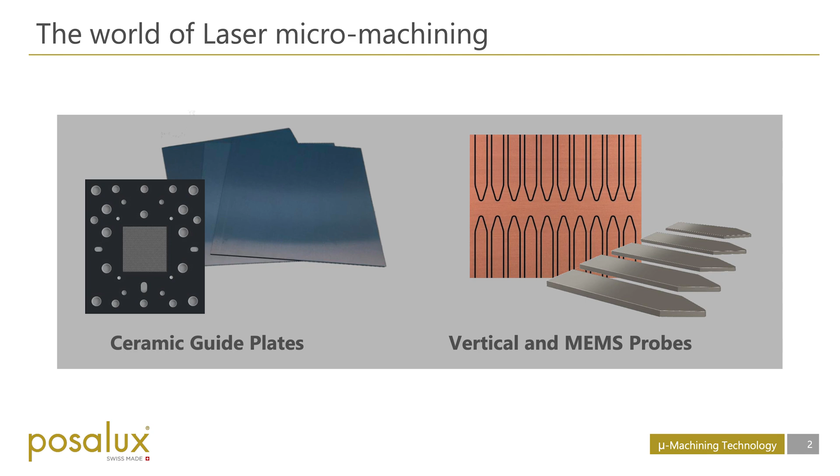Then I will discuss increasing challenges and the work done by our application and R&D people. After this, I will go back to the initial question to understand if femto-laser is really enough to cover actual and future needs. The question is: femto-laser, yes, but—and we'll see what are the other essential elements. Then I will finish with a quick conclusion and make sure the initial question gets an appropriate answer.

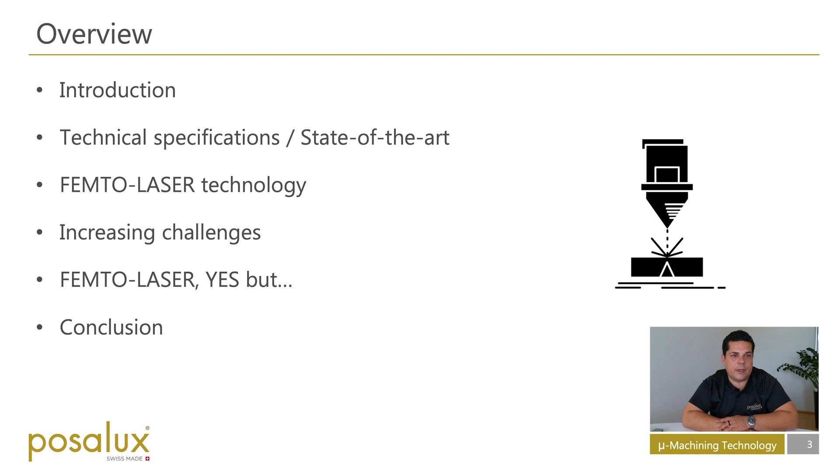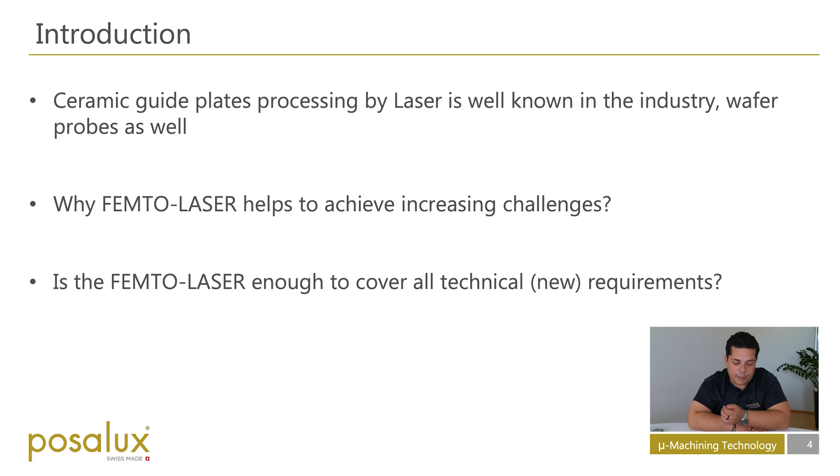Ceramic guide plates processing by laser is well known in the industry. We also have seen a tendency to cut probes also by this process. Why does femto-laser help to achieve increasing challenges? All along this webinar, we will understand if femto-laser is enough to cover all technical requirements, actual and future.

Now, technical specifications and the state of the art for guide plates. Here we can see the main specifications for drilling and what must be achieved: round, square, and rectangle holes, dimensions down to 20 micron or less, corner radius if possible less than 3 micron for square or rectangular holes.

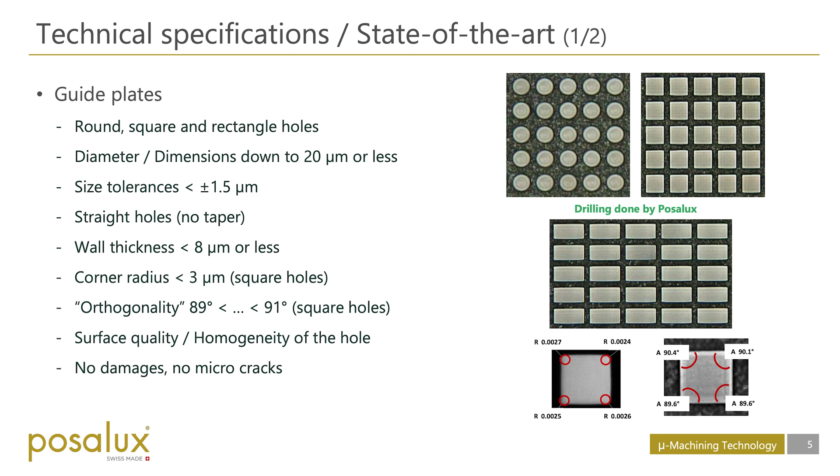Then, to avoid any functional problem with the guide plates, there must be no damages and no micro cracks. Of course, there could also be additional requirements, but here we talk about the most important ones.

Now, technical specifications about vertical and MEMS probes. I mentioned at the beginning of this webinar that the tendency to machine this kind of probe by laser is increasing. Here we can see the most important specifications. We start with size tolerances, which must be less than plus or minus 1.5 micron, with a minimal width down to 15 micron.

Here is an example of work we did in our R&D to reduce the width of probes, where we actually achieved 15 micron, but of course it can be even less with femto-laser.

A sharp angle is also important to correctly hold the probe during the test. This angle should be as small as possible, but generally should be less than 5 micron.

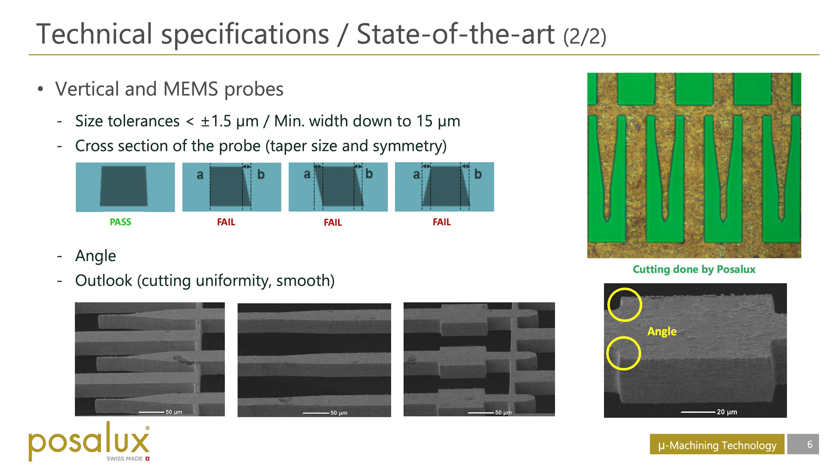Last but not least, the outlook after probe cutting is also a very important criteria or specification. The cutting uniformity and smoothness is a key point as well.

So let's deep dive into the femto-laser technology. What does femto-laser mean? A femto-laser is a laser which emits optical pulses with a duration well below 1 picosecond, in the domain of femtoseconds.

For long pulse laser like microsecond or nanosecond laser, the main issue is material integrity. You can see in the picture some ejected material, damaged surface, heat affected zone, melt zone, and micro cracking, which are not present in the ultra short pulse laser process. You have no debris, no damaged surface, no melt zone.

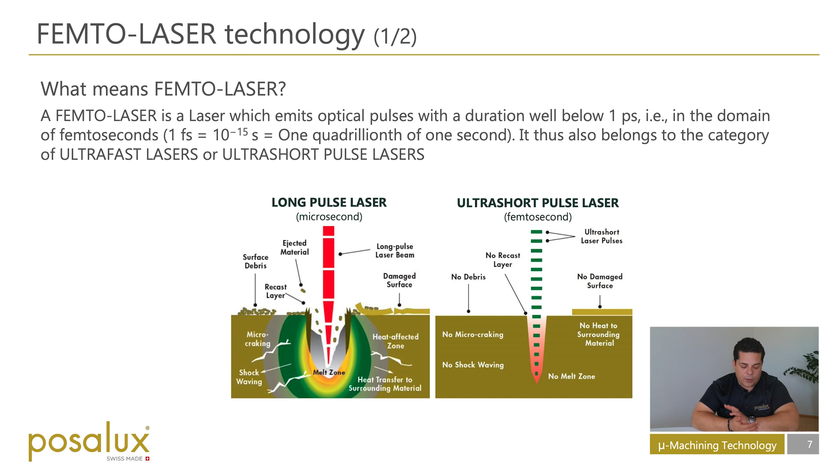So we can say the femto-laser is like a cold ablation process. The pulse duration of the laser is the key parameter to achieve a non-thermal process. The maximum pulse duration to avoid thermal effects is dependent on the material. Generally, a pulse duration less than 500 femtoseconds is okay for most materials. Here we can see the difference between ultra short pulse, which is less than 500 femtoseconds, and a long pulse laser, higher than 500 femtoseconds.

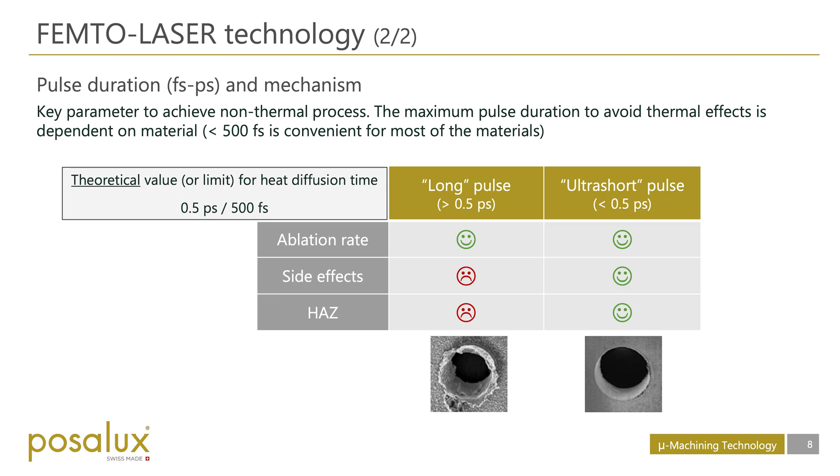Now that you have a better understanding of what a femto-laser is and its specifications, let's talk about challenges. Here we put some points which we worked out with our application team, representing the tendency of the market and what we will need in the future. First, the increased number of holes per guide plate. We did a test where we drilled more than 100,000 holes with reduced pitch, meaning a wall thickness down to less than 8 microns.

Second challenge: productivity. When you have a lot of holes to be drilled, like more than 100,000 in this example, productivity is very important. We are talking about several days of production. So if we can reduce the production time, this is also very important because it will reduce the cost.

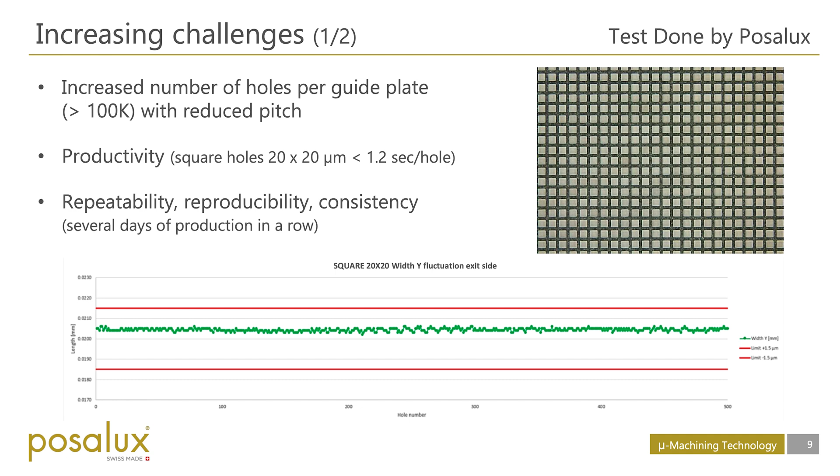The repeatability, reproducibility, and consistency of the hole quality. We run several days of production in a row, so it's important to have the same quality of the hole from the beginning. The first hole we drill and the last hole we drill must be the same quality and consistency. Here we have a graph showing, all along a production run, the stability of the size of the holes, which is about plus minus 1.5 microns.

What is very important is also the high positioning accuracy. Here we have a process accuracy within plus minus 2 microns. This is also the tendency, to reduce and ensure the positioning accuracy is stable and very small. Plus minus 2 microns is a challenge, but it is already running into production.

Stability and reliability is also part of the challenges. We are running 24/7, so we can couple this with the consistency we just talked about. The stability is very important. We also have to distinguish between R&D and mass production. All what we do in R&D is very important, but applying it to mass production is not just applying what we did—it also requires experience, preparation, and adjustment to make R&D matching with mass production.

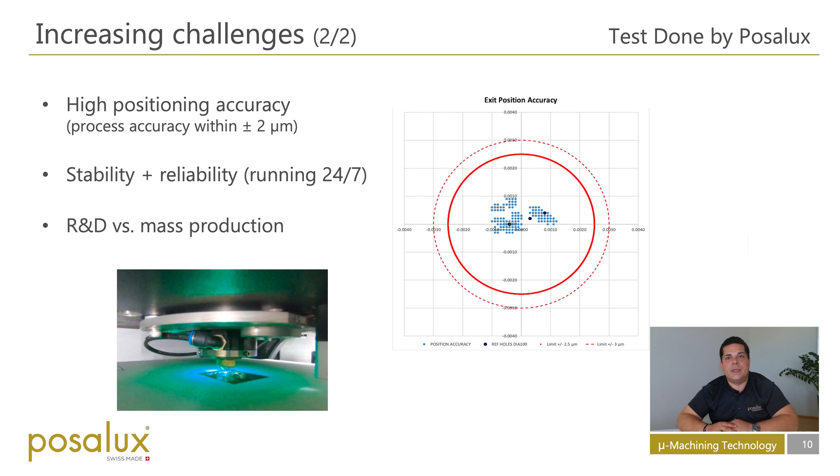To sum up, the femto-laser really helps to achieve challenges in terms of productivity and surface quality, but it doesn't cover all the challenges mentioned earlier. Some other components are essential to reach a higher level in application.

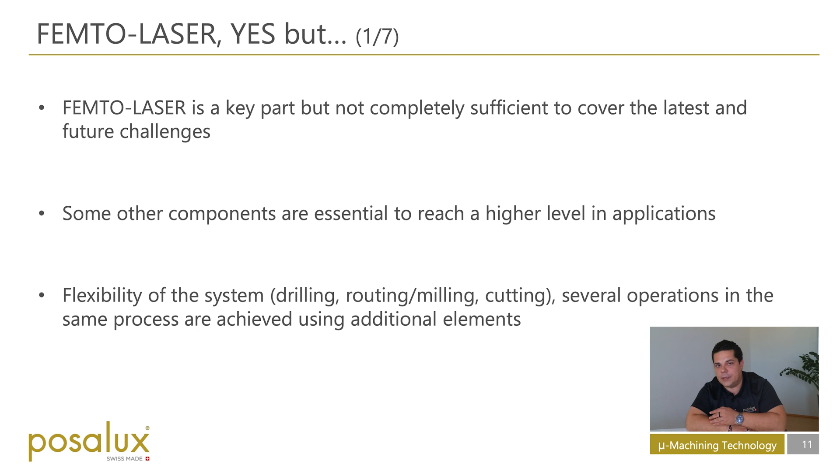Flexibility of the system is needed—drilling, routing, milling, and cutting. Several operations in the same process are also achieved using additional elements and not only the femto-laser. Femto-laser, yes, but a precession head is needed—in other words, an optical 5-axis beam management system.

So the technology shown here demonstrates the comparison between conventional laser drilling and 5-axis drilling, where you can see the laser beam can be tilted and moved following 5 optical axes: X, Y, Z, and incidence angles. Thanks to this, specific geometries can be achieved.

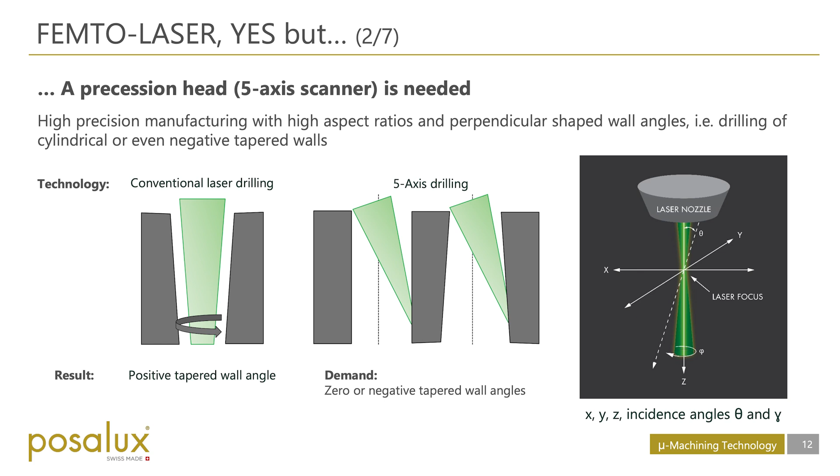Here we can see 0 or negative taper, straight holes. This is all managed by the 5-axis scanning head. FEMTO-LASER, yes, but a precession head is needed. The laser is moved helically with a tilted laser beam.

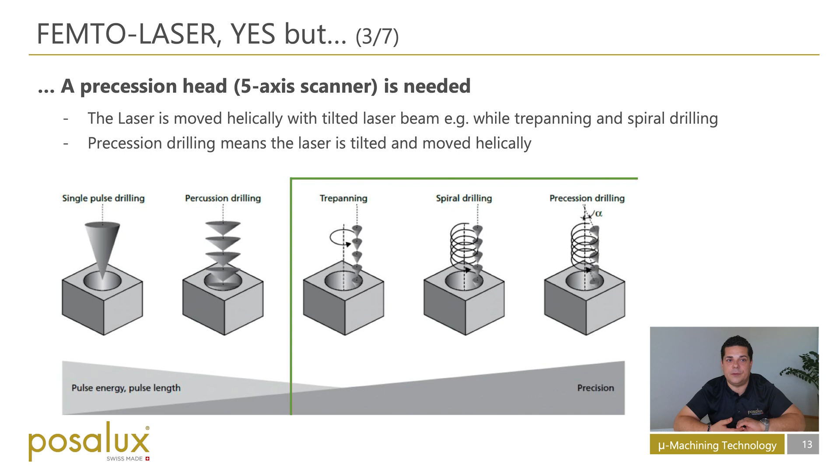In the picture here, we can see from the left to the right side the complexity of the laser and beam management system, from a single pulse to trepanning and up to precession drilling, which is the most accurate in terms of optical axis movement, allowing all kinds of shapes and geometries.

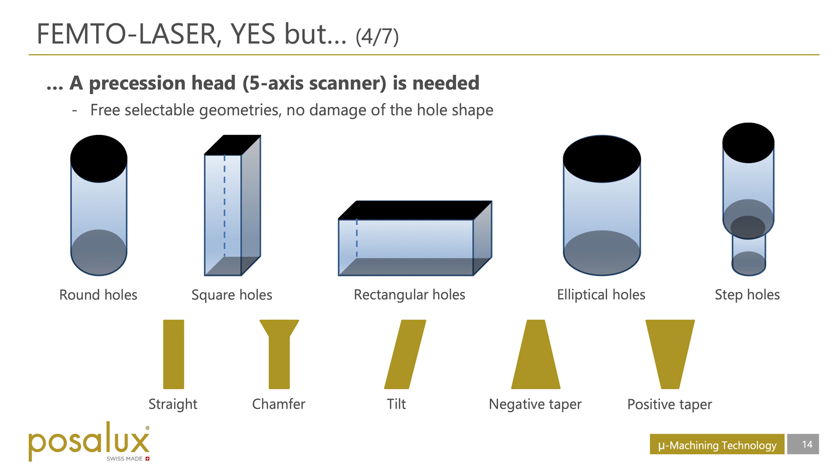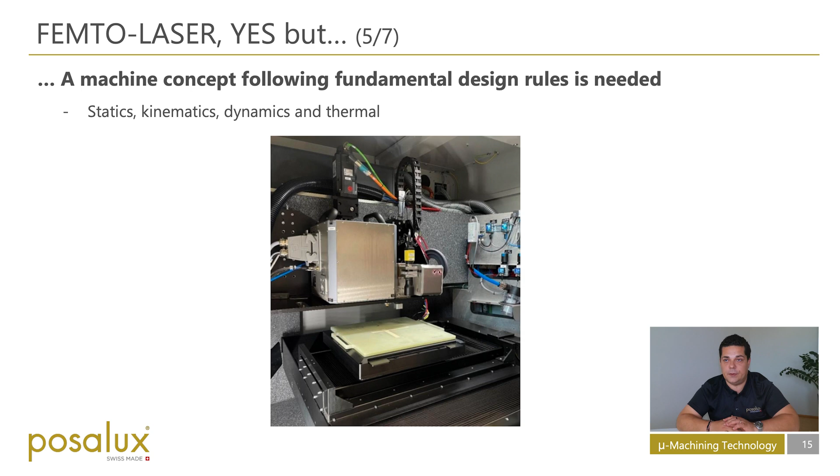FEMTO-LASER, yes, but a machine concept following fundamental design rules is needed. Here the most important points are all related to the statics, kinematics, dynamics, and thermal behavior of the equipment in its global behavior.

When we talk about a machine concept following fundamental design rules, as I told before, the static behavior must take into account the efforts of the machine.

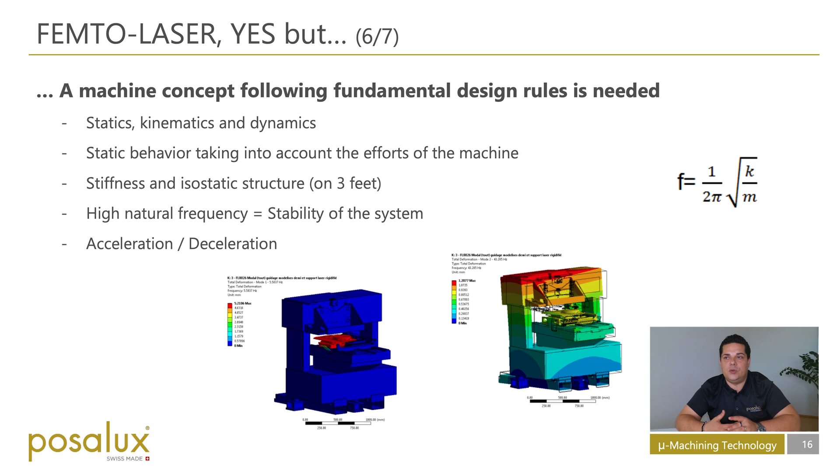We are using stiffness and an isostatic structure on 3 feet, so it makes all the machine, all the equipment, very stable, and the stiffness is there. We must make sure, according to this formula, the high natural frequency matches the stability of the system, and we have to take into account all acceleration and deceleration of the axis to make sure the stability is there.

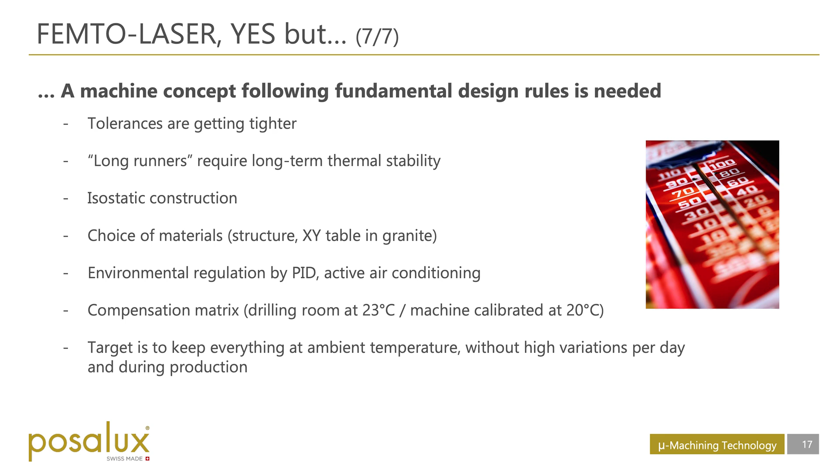All along the webinar, we have seen the benefit that FEMTO-LASER brings to the production, but we also learned that it's not the only key point to achieve the increasing challenges for the future. So we need a combination of different components: using a 5-axis optical scanning head is also very important, and to build an equipment, a machine, according to the state of the art is also a key point, and that's all three we have seen during this presentation.

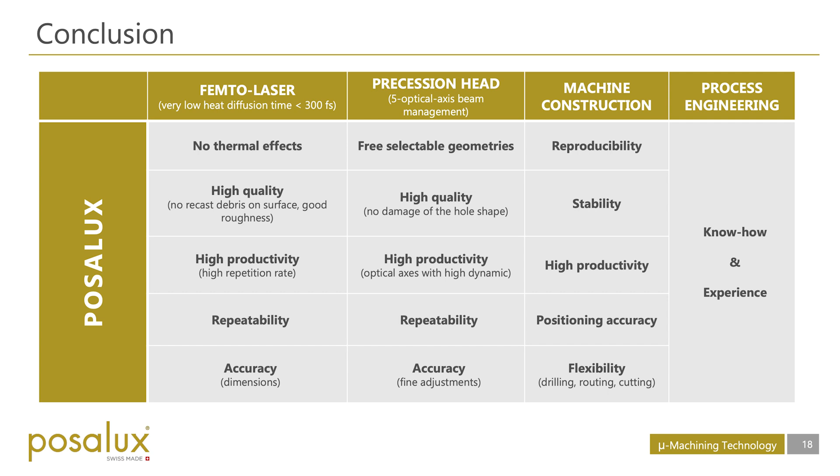We also showed you the way our application engineers developed some jobs, for example, to run more than 100,000 holes with high stability of results. This is a combination of all three elements we have seen before, but it is also a point related to know-how and experience we developed over the last 5-6 years.